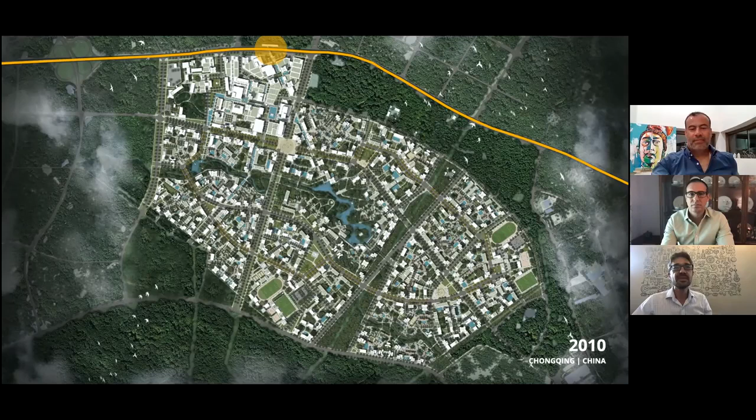This one, which you see here, we didn't think much of back in 2010, but it was the beginning of the Chinese expansion of high-speed rail. This is a completely new city that we designed from zero, and as you can see, the axis integrates nature and integrates the station into the urbanism.

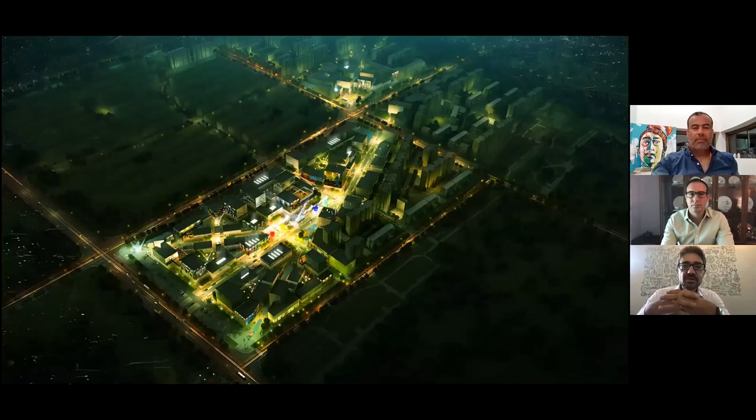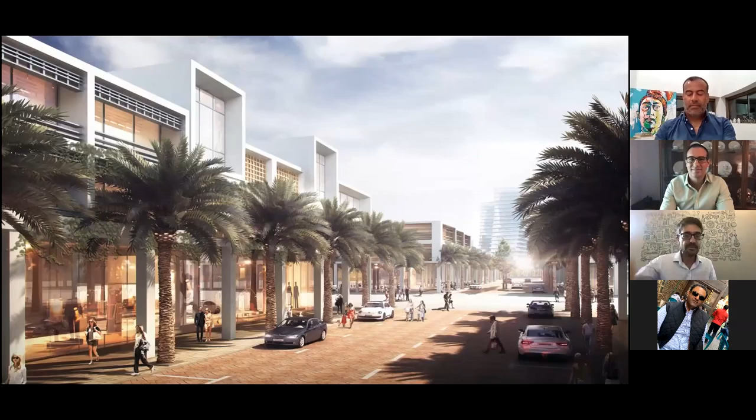We did this constantly, and within the last 10 years we've worked in over 24 cities in China, big and small, designing high density neighborhoods and towns to capture the migration happening from rural areas into the cities. Back then we understood it wasn't just about planning - it was also about the architecture and, more than anything, the behavior of mobility, which is the result of a well-orchestrated project, considering not just the 30,000 feet above our heads, but also how the detail at street level is put together. If we sacrifice that detail, that scrutiny, it will be disastrous for our city building.

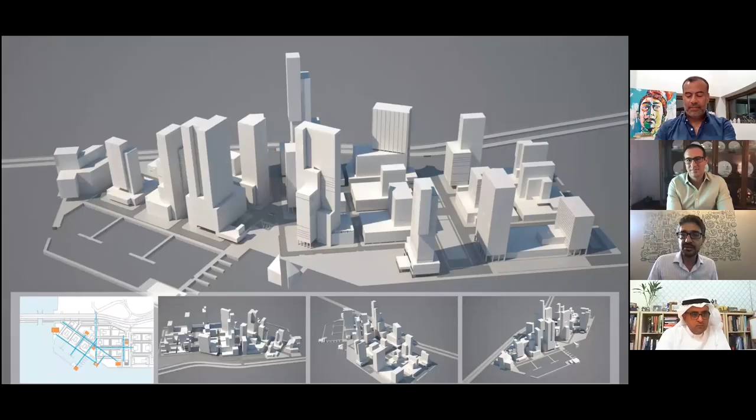So the architecture is extremely important - the way the buildings meet the street, provide shade, the landscape, the way cars park. That has been our interest for 10 years. We've little by little begun to really unravel the way these things are put together into transit-oriented developments. Nowhere is this more evident than in projects where two modes of transportation meet each other.

In this case, high speed rail and the waterfront - changing from land to water. So from China, we've done work in Oman, in the US, in Latin America. The way one connects, the way one walks, transfers between different modes of transportation is an essential way of moving - it's essential to our projects.

The architecture is also important, so we depend on local architects. We don't know everything in the world, and we don't pretend to. We're not one of these boastful architects that says 'I will do everything for you' - we don't. We work with local architects in every project. In this case, the architecture was done with Chinese architects on one of our projects, which needed to be iconic and memorable. It's located in the South China Sea, and as you can see, the architecture is very culturally related.

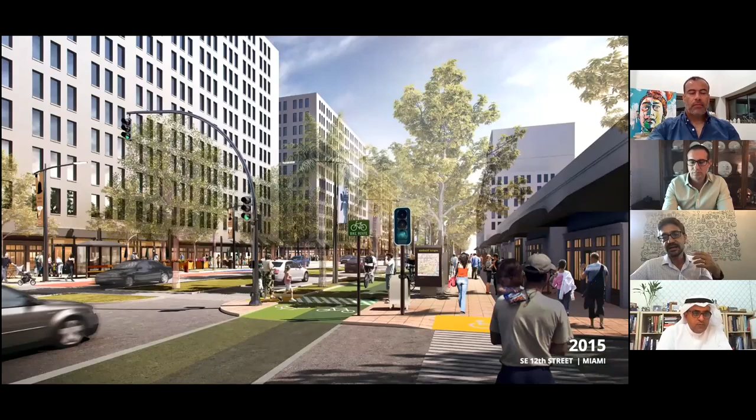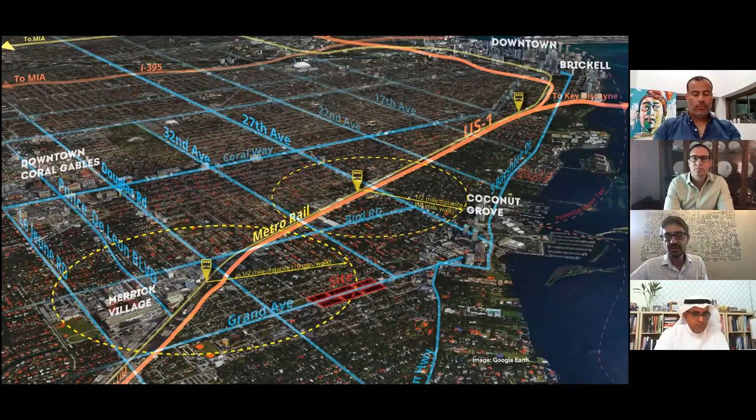In 2015, we realized that while we enjoyed working abroad, we had big problems in Miami. The main problems in Miami were transportation, mobility, and the way we honestly did not care about our streets. So we started working with the planning departments and with the departments of transportation to transform these streets with transit-oriented developments. One after the other, we realized there were opportunities for developers and places for people to live close to transit and have other methods of mobility.

Worked with several engineers to put this together, and not just the infrastructure, but the architecture that comes with it.

So little by little, we became more and more experts in the way people move, in the way people live, play, and work around transportation. So that essentially has become our focus. Our main focus for our office has been transit-oriented development, or what I would like to say, development around transit.

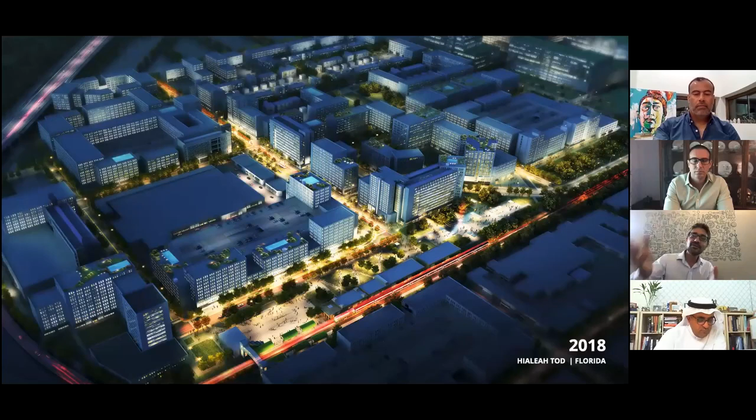I think that if you turn the words around, it is much easier to understand. This is also an image of our Hialeah TODs, which was awarded for Florida Planning for Economic Development. And with that, this is a very brief intro of 10 years of blood, sweat, and tears, as we like to say, but a lot of joy.

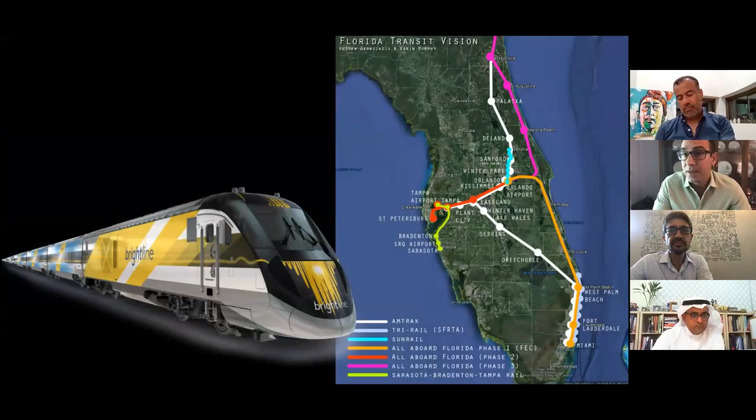In Florida right now, the state is seeking to reconstruct its rail system. We have investments, shown on this map, occurring in both the private and public sectors, such as Brightline, which is Virgin Trains by Richard Branson, along with other public sector investments beginning to form a skeleton of a rail system.

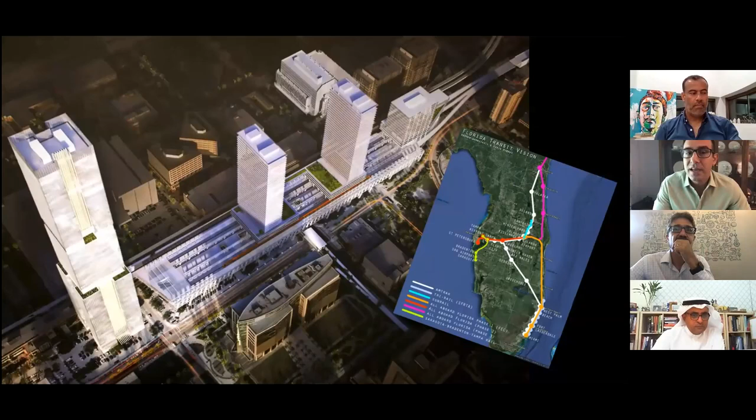This is an example of the TOD being built in Miami's downtown called Miami Central, the terminus of our higher speed rail system by Virgin Trains. In this case, the skyscrapers are in the station.

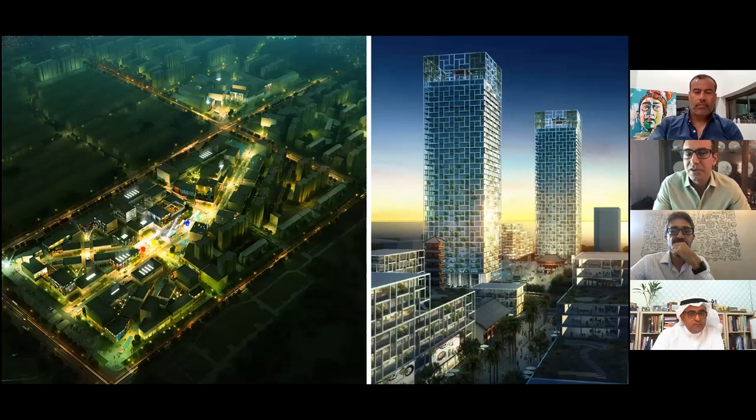But it need not only be skyscrapers. There are many examples where the scale is much more intimate and walk-up scale—higher density, but at a lower scale of buildings. These are from different projects.

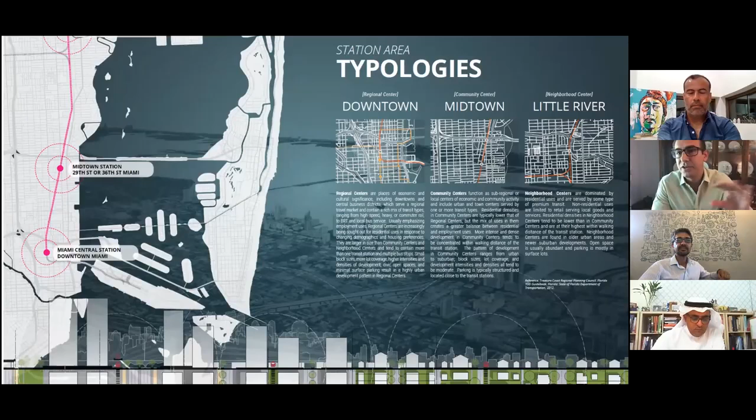Station area typologies: TOD takes a different format depending on several factors, such as the metropolitan context and the mode, and how many modes are crossing at a certain area. In this part of the line we're examining, we see at least three or four different station types: the downtown, a regional metropolitan hub; midtown, a more community, modest scale hub; and Little River, showing a more neighborhood scale station. Each of these has different implications in terms of density, height, and attributes.

In the downtown station, we look at the concept of the last mile—or last kilometer elsewhere in the world—referring to one's ability to walk or access other destinations once arrived. Sometimes this is the most difficult trip of all, and the one that can discourage someone from making the trip in the first place. If the last mile isn't wonderful, people often want to drive instead, so we need to make that last mile wonderful.

And so this is the Tri-Rail Coastal Link. As you see, we're going to skip about at some of these different stations of Miami, North Miami, and Aventura, and show a few different lessons from each of those in the presentation.

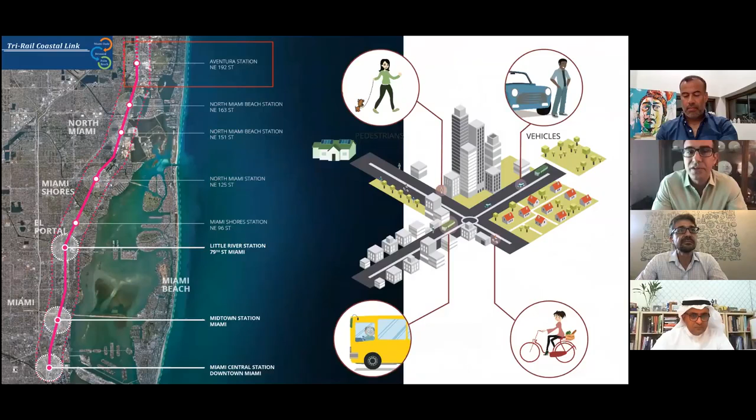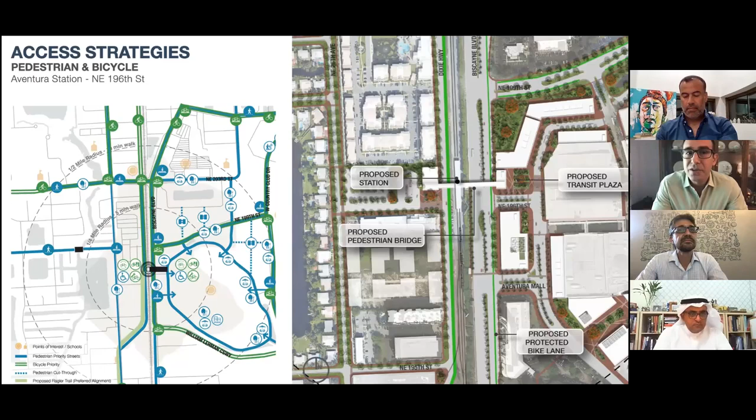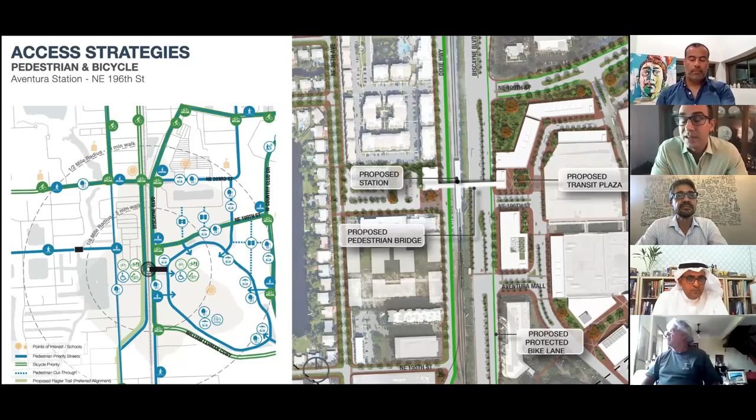And so this shows that multimodal necessity. So this one from Aventura shows the pedestrian and bicycle access. So this would fall within the public realm interventions, examining how does one approach the station, not only by automobile, if you're going to park there, but how would we walk to it? How would we bike to it? Or Uber, or whatever the method is. And so how comfortable and safe is that ride? And then identifying obstacles to that safety and that comfort, and showing how to change that over time.

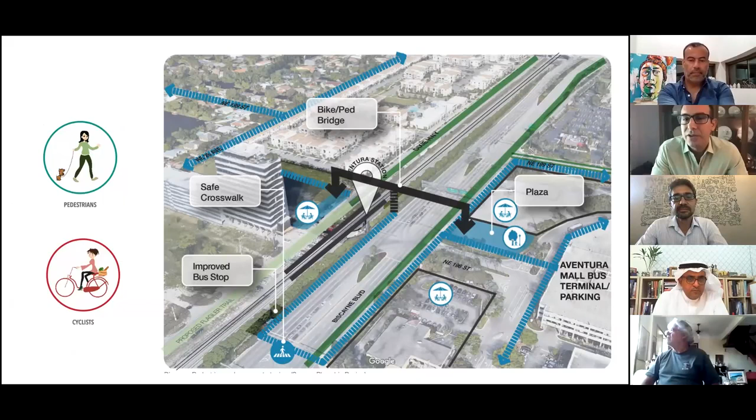In the SMART plan, which is really focused on Miami-Dade County, we have had the privilege of working on 5 of the 6 different corridors of transit. And as Sami had said, they are all different technologies. One is BRT for now, which will be perhaps rail in the future. Some of them are commuter rail, elevated rail, and there's even streetcar involved in rubber tire trolleys. And we have the higher speed terminus of the Virgin Trains, plus the airport. So basically it's a multimodal environment, each with different technologies, speeds, and station spacing.

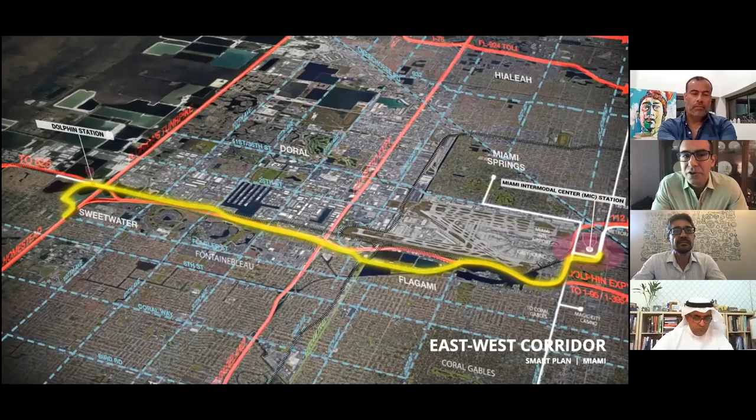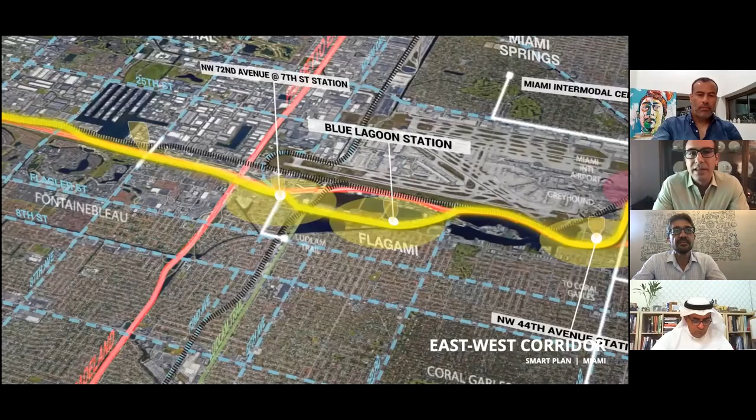So the east-west corridor is the first one we'll take a glimpse at. And this animation shows briefly how the east-west corridor links the downtown and the airport to a major university campus, which is Florida International University, and then all of the communities between those two poles, such as Blue Lagoon and the Dolphin Mall, and I'll show you the plans for those as well.

Andrew, may I ask, while you're sharing this and the different type of transit, what governs the infill development between the stations? We have different types of stations, different types of transit. As planners and urban designers, what makes it a successful development infill, and what is the criteria?

Well, some of the stations definitely have a theme. For instance, the university campus is really, of course, driven by the activities of the university, whereas others tend to be more employment driven. They're heavy on office and less so on other uses, whereas others are mostly residential. And I think it really has to do with some of the context. For instance, the ones next to the airport, it's a harder sell to imagine apartments and villas, especially with the noise of the jets taking off in one of America's busiest airports.

So sometimes it's a negative factor which makes the decision lead toward a certain preference of a use or not, or a certain density or not. But it really has to do with the quality of the transit, the frequency of the stops, because the more favored stations, the ones that have better service, generally have more residential demand to them as well.

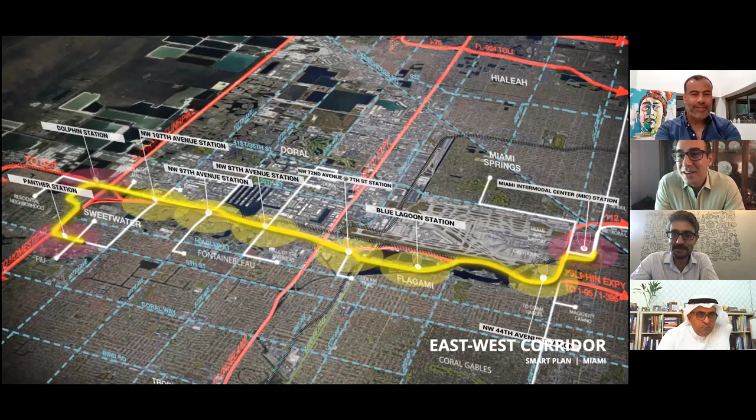In fact, in many projects, we come up with these beautiful renderings of these beautiful places, and then the data comes back and we have to bring it back down to reality. And so the images are not as wonderful, but they're real. And so we hope that, in the future, 40, 50 years, things will change. But there are renderings that I will not show you today because they are not as beautiful as the visions that we have. Our economic advisors will often stand there above our shoulder and say, that can't be 15 stories, you must make it 6 stories, and then we're brought down, we're humbled.

Okay, so this is a comment which is: vision precedes code. In other words, we always must vision before we know how to create the legislation to implement it. So coding is one thing, but visioning is another, and visioning should come before the codes or the zoning code reform.

Normally, who established the vision? Ideally, we'd love to be involved from the very beginning, so that we generate both the vision and then are involved in the code to help implement that vision. In some cases, a vision has already been created by another firm or the client, and we are asked to update it or write the legislation to implement it. So we enjoy working on both types of projects, either the whole package of visioning and code, or just one or the other.

Any cases of a design build? If it is design build, that means vision plus execution become very clear and obvious, and even the output is really fantastic, because the client and designer are working together at once. Certainly, in certain cases when it's a developer tender or RFQ, this is more so. When it's developer driven and the desire to build immediately is stated up front, the design is merely trying to get to construction documents rather than the longer public visioning exercise meant to allow several years for its build.

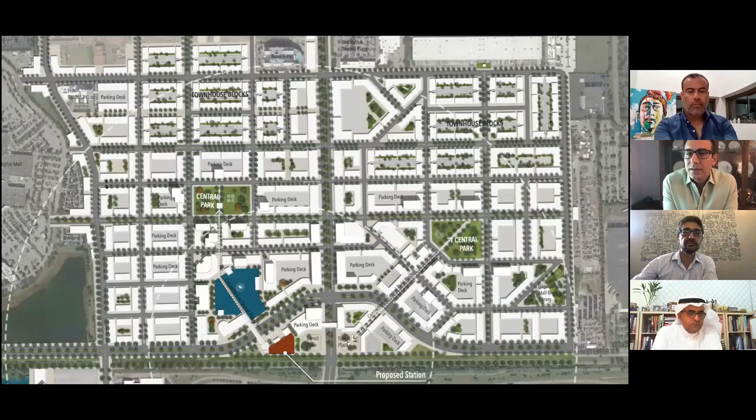We have some renderings. This is from a neighboring place on the train line, but it's representative of the type of scale one would see along this TOD, showing higher density but achieved at a lower height than the projects we've engaged in Asia or elsewhere abroad.

This shows that we're also interested not only in the higher view, but love getting into the details of paving schemes and landscape and the way buildings interface with the street, especially at ground level, so there's a sense of transparency and visual interest. This one shows a shared space, which is controversial in some places in the United States but very common in other cultures, where you remove the curbs and allow slow-moving vehicles to mix with pedestrians in that sort of civilized environment.

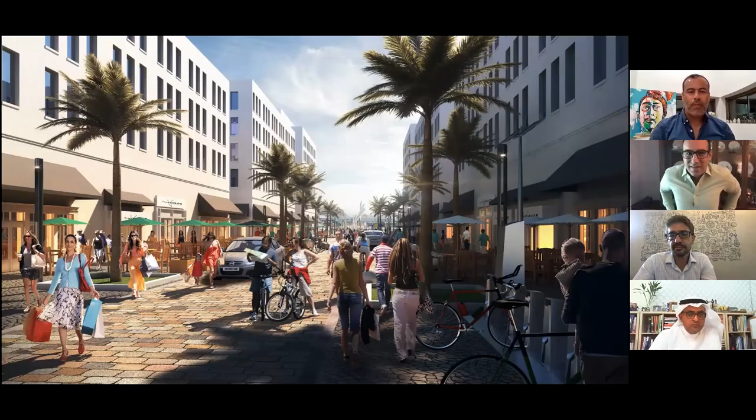But when it comes to larger streets, how would we do such things? You're absolutely right. A very wide boulevard or avenue or highway retrofit is a much different street design problem than doing a capillary, a neighborhood shopping street, or something of that scale.

So later on, I'll show you a few renderings that take on the topic of the larger street. But I think that when we look at the precedent of large streets that move volumes of traffic but are still a pleasant walking environment.

Think of the boulevards of Barcelona, like the Passeig de Gracia, or the famous ones in France. You can see examples of places with wide sidewalks, street trees, interesting architecture, and yet extraordinary high volumes of automobiles—sometimes 50 to 100,000 per day, comparable to our interstate freeway volumes—but they do so without being a blighting influence. They're a value-added good address, whereas our interstate freeway systems are not an address, but something we turn away from because they're so offensive.

So even in the United States, there's a wave of freeway teardowns occurring in American cities, in which highways that were once elevated are now turning into boulevards at grade. So that's another thing we could speak about in the future.

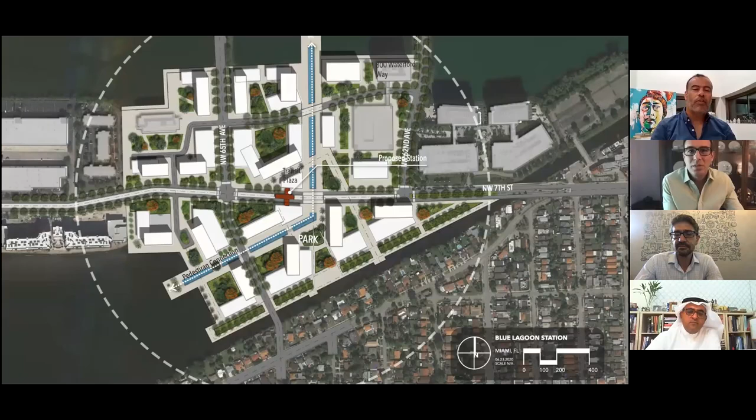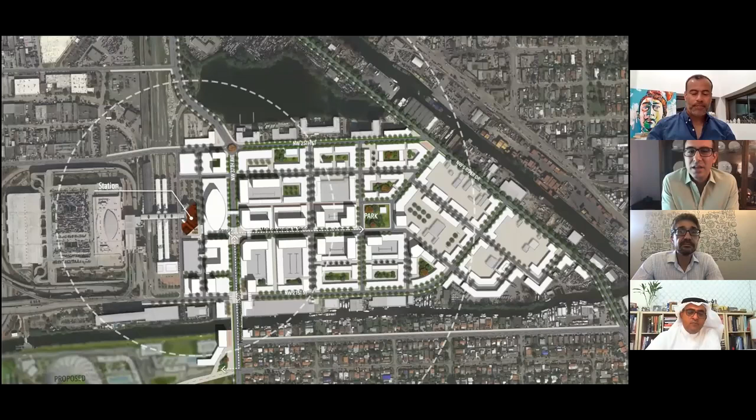Yes. So this is the Miami Intermodal Center, and it's particularly interesting because there are about 5 or 6 different modes converging upon this one spot. One is the airport itself, which is one of the busiest in the nation and services all of Latin America, direct flights to Europe, etc.—Miami International Airport. Then there are three different scales of train arriving here: Metro Rail, our elevated metro system, the shuttle to the airport, and also an Amtrak station. And I think there's also Tri-Rail.

So maybe there are 4 rail systems coming here, plus a car rental hub. This was an underutilized piece of industrial property located immediately to the east of that hub. This study was looking at how that could be reclaimed to create at least 20 blocks of urban infill and redevelopment opportunities geared toward those who wish to be near the airport, both for employment purposes or even residential in a limited fashion.

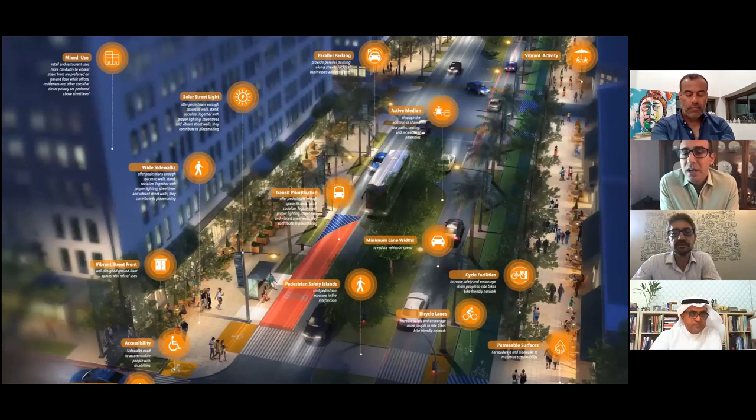These are street design diagrams showing the importance of starting to look at the fine scale of both paving, crosswalks, illumination, trees, and how all of this comes together in an ensemble that creates the public realm. And I don't know if this was the right place to talk about it, but nighttime experience is important.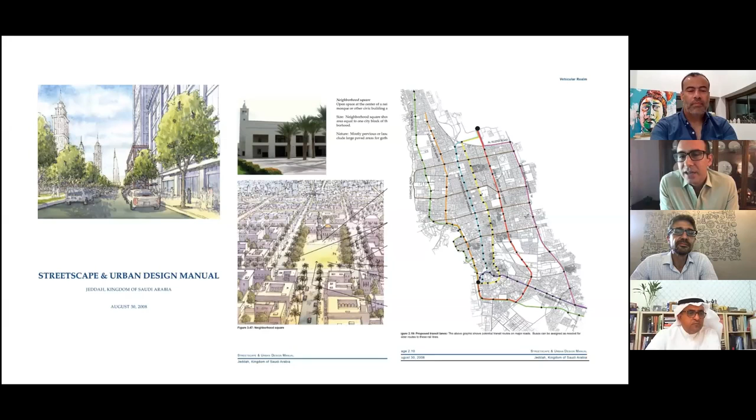So that's exactly you're answering my previous question in a layer, which is wonderful. Thank you. So you still could make it happy, lively, and still have the car transit not delayed, but can also...

Pedestrian attractive as well. Yes, and once again, you've already started to do that in Saudi Arabia, because these roads have a boulevard format. In some cases, they have a slow-moving frontage road where drop-offs and parking and access can occur, but then the main thoroughfare is unimpeded by that parking and such.

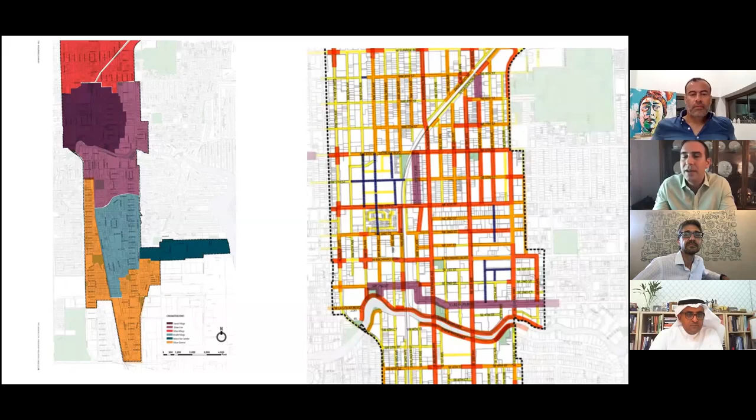This is an example of a code which looks at both the regulating plan of the zoning districts, and on the right you see what is called the ABC streets map. In a code, it's always important to acknowledge which streets are of the highest priority and get the best treatment, because not every street in the city can be a great pedestrian frontage. Some are more messy, some more utilitarian, others more geared toward pedestrian and shopping. Each street has a different context.

What you see in dark blue are also the super blocks that need to be cut up, or in which new connections need to be added. Then there are several pages showing the different cross sections envisioned on a street atlas, so you can see how the streets ought to be rebuilt in the future in order to reinforce pedestrian comfort and safety, and ease of access to transit.

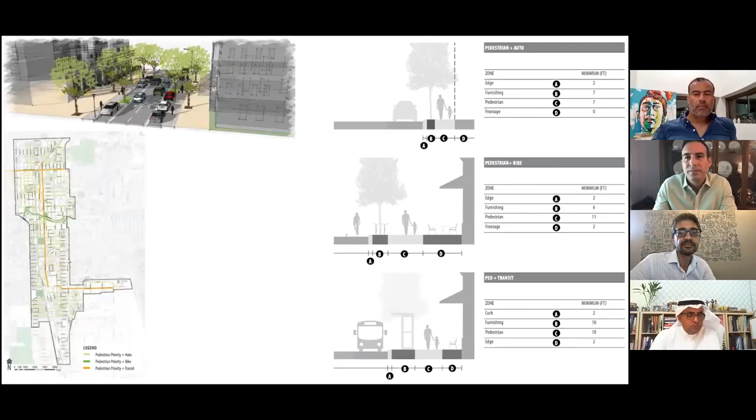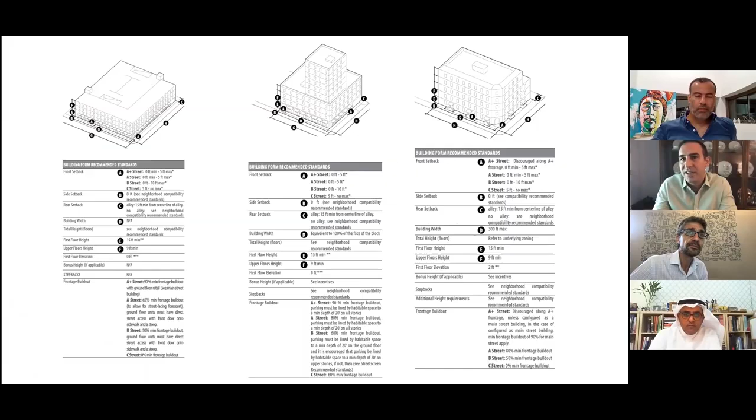And finally, there are building typologies or building types, which have dimensional requirements, so that we would be able to compose that fabric with buildings of varying height and scale that meet the density requirements for that transit investment. These are samples of the building type recommendations.

And these are also ones for transparency, because nothing is worse than walking along a blank wall, which happens a lot in our country. So we want to avoid blank wall syndrome, so that safety and visual interest can be encouraged by having lots of transparency, especially in the first two floors.

Day and night as well. We call that CPTED, Crime Prevention Through Environmental Design, which is a series of principles that we look to thwart antisocial behavior and crime through good design.

Like bank designs. New bank designs are all about full transparency for security reasons. What is the minimum percentage of transparency typically in code in urban streets?

Generally, in ground floors of retail environments, it tends to be a minimum of 50 or 60% glazing at the ground floor. But in residential and office upper floors it tends to be less, usually 15% minimum, 10% in some cultures, depending upon the climate and the local building practice. But we see that there's a range of percentages really depending upon the use and the desired building articulation.

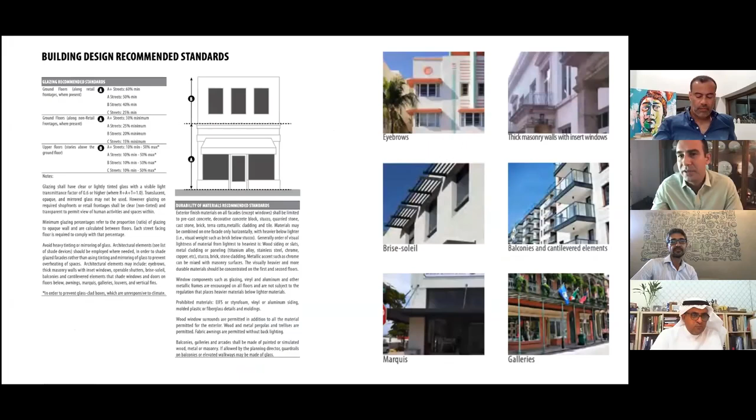And then, of course, there are recommendations also on making sure that street trees have a longer lifespan by looking at proper planting regimens and other details, so that we can keep that important feature of pedestrian comfort intact, which is the tree, the urban tree.

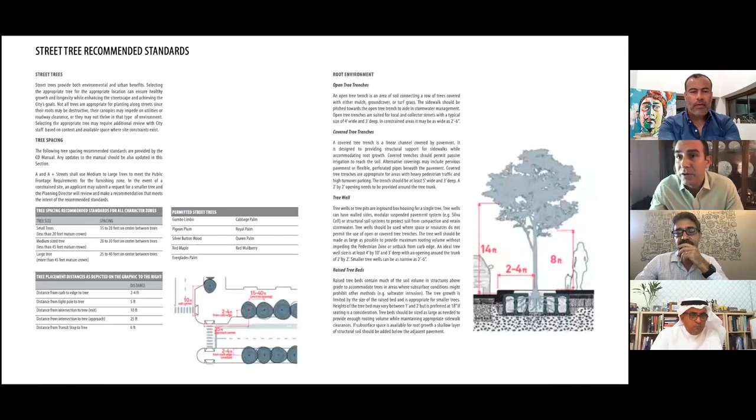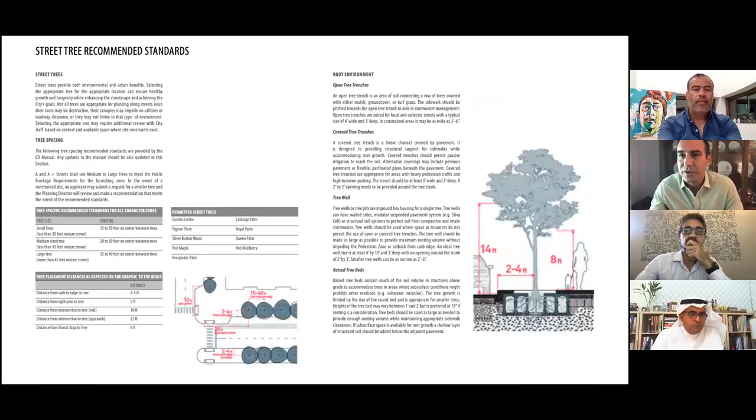So are specific trees more appropriate for an urban space than normal trees? Yes, particularly trees that tolerate a lot of foot traffic along their roots, and those which can sometimes be drought tolerant in case watering isn't occurring as often as it should be. So a series of factors would lead us to choose one tree over another. Sometimes it even goes down to how often the tree sheds its leaves, so that it's not too messy a tree, for instance. Many other factors would lead one to choose one or another.

That's where you need an expert landscape designer with the team. Certainly, yes. A local landscape architect will help us to be species sensitive, because sometimes if we land in another place and we don't really know yet, even if we thought we've researched it, we really need somebody local to help us understand it.

And then, this is a very new science in form-based codes, which is sea level rise adaptation strategies and resilience strategies. So the form-based code for the entire city of Miami, Miami 21, is undergoing a resilience audit right now so that these things can be built into it. And we were able to put some of these recommendations into the Fort Lauderdale downtown code as well.

So we see that coastal Florida cities and places around the world that are threatened by sea level rise, like Holland, Bangladesh, Rio, and the Maldives, all of these places are low-lying and have high population densities that will be threatened by one to two meters of sea level rise in the coming 50 to 100 years, which we need to think about already.

Would cities like Dammam or Jeddah have to consider such a threat, probably even in the long run? I believe so, because I remember when I was in Jeddah, we had the heaviest rainstorm of the year, and because Jeddah has no stormwater system, there were trucks that had to suck the water from the edge of the streets in several districts.

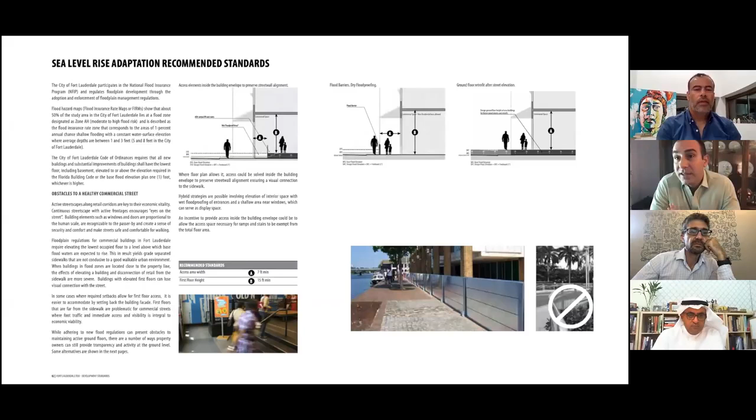I see, so it's similar to some parts of Miami, where at 2.5 to 3 meters, the groundwater is also becoming higher as the sea level puts pressure on the ground aquifers. So we're seeing the ground becoming more susceptible to flooding even in fair weather, because of that phenomenon. I don't know the geology of Dammam, but I imagine it could be a sandy substrate similar to Miami's, so maybe it is under threat as well.

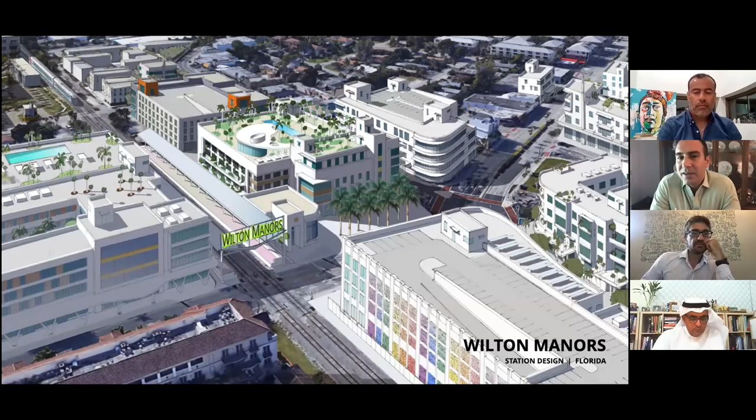Finally, this is very near the end of the presentation. These are a few renderings done for zoning studies along that three-county northeast corridor. This is Wilton Manors, showing a potential station location, and then the ability to redevelop the surrounding properties to add density around that station and attract new riders and new residents.

What is the minimum length of the corridors, Andrew? Like this project, what is the minimum corridor to call it a corridor and make an impact? And second, how do you call on the owners around the corridors for improving buildings and increasing densities on those properties? So basically, how do we determine the amount of land that's studied around each station, and the length of the corridors? Is there any minimum length for it?

Well, no, this one is a very long corridor. It's actually hundreds of miles long, and it has two different speeds which will be accommodated there. One is a commuter rail that has very frequent stops, and the other is a higher speed express train, which accelerates up to 120 miles per hour between cities. Some stations have both the commuter and the higher speed service, but the commuter rail is only about 50 miles long, while the other is 280 miles long. So really, it's two different size corridors.

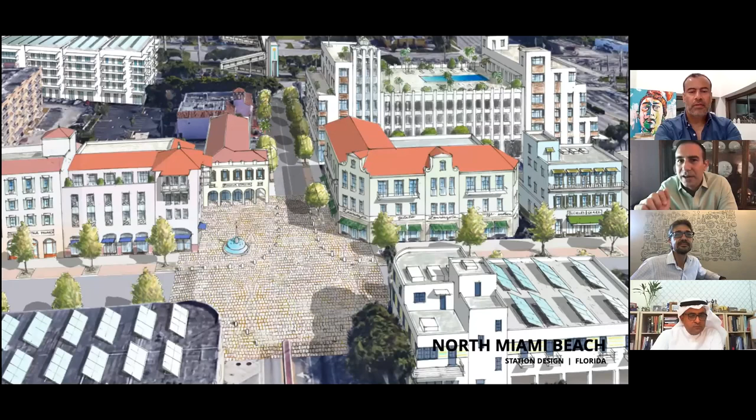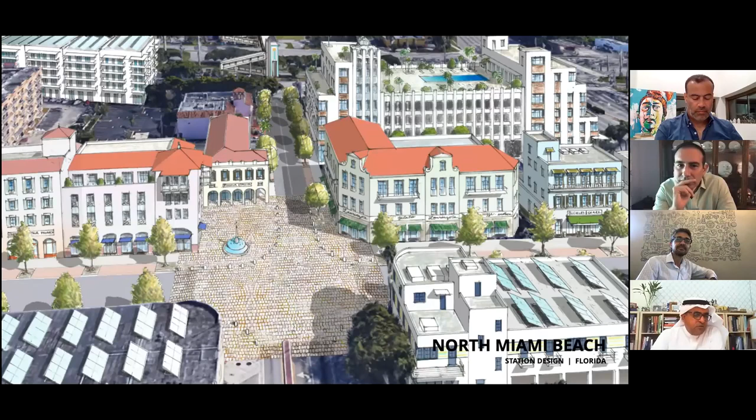I have one question here. In a previous image, for that intersection, how do you as a designer determine the form-based code for the neighborhood surrounded by it? Is that true, is that the neighborhood... the code makes the neighborhood undesirable? Is that right? That means the neighborhood suffers from the code?

I believe, as an optimist, if designed with love and care, the TOD improves the livability and the aesthetics of the neighborhood. But one could have transit-oriented development that was insensitive as well, and that could be detrimental. So it really does make a difference to have a handle on the different designs, particularly whether buildings are street friendly or not. It's not just important to be dense or mixed use, but what is the quality of those facades as perceived by the pedestrian. That makes all the difference in inspiring them to walk or not.

Another thing that we have found is that, especially in the areas that we work, around the rail lines has typically not been high demand residential and have not really brought values of those properties up.

That's something that's changing right now. Being next to the station is actually, as Andrew was discussing earlier, an improvement. It is actually desirable, but it hasn't been for many decades. Typically you have—and I'm showing this slide because as you can see, the quality here is not very residential-like. You don't have many people that are against the improvement of the area.

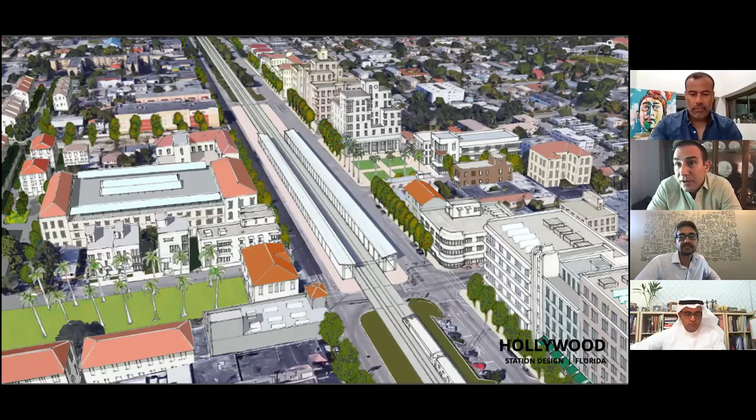This is downtown Hollywood, also looking at the zoning, both the permitted uses and densities currently on the books, and searching for ways to propose modifications to the zoning code based on the community vision. That's what this was, a sketch created during that exercise.

We are very grateful for having listened and paid such close attention, and for the questions you will give us now. Thank you very much.

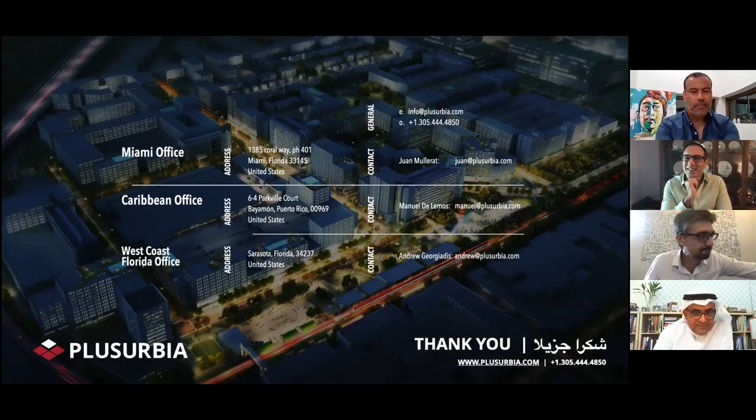Hello everyone. Hello, Dr. Atif, greetings. Hello. Dr. Atif, you're muted - unmute Dr. Atif please. I've been muted by the moderator. Oh no, my mistake, go ahead.

Sorry, okay. I think it's afternoon now in Miami, so thank you guys for speaking to us from across the Atlantic. Andrew and Juan are, I think, the best prophets for the TOD philosophy, and I think we are all converted.

It's logical, I think, but we are still struggling with it here in Saudi Arabia. I'm speaking to you from Riyadh, and I was really touched by the story of your grandfather, Andrew. During your presentation you answered most of my design questions, but we still here in Riyadh are crawling to be a TOD city still, with the development of our metro line happening very, very slowly.

There are no real questions - it's very hard to dispute any of the suggestions and proposals in this presentation, especially the first and last mile and conversion of a street to be more receptive to pedestrians, all great concepts. But then looking at - and I'm not an expert in this, I'm an architect - the whole value chain of TOD, and I'm taking Riyadh as an example.

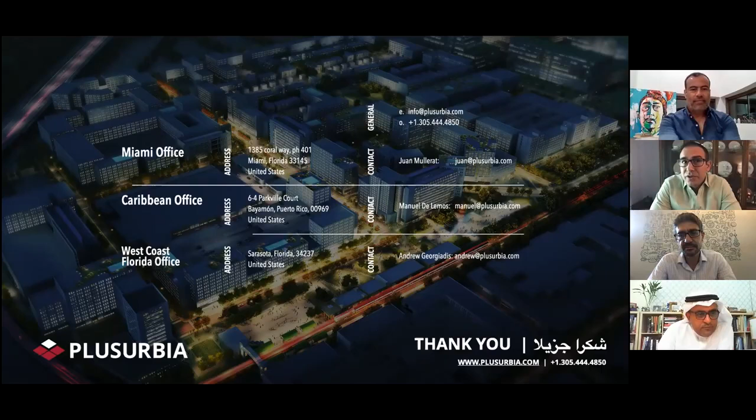When President Obama was president, there was the high-speed rail program, which unfortunately floundered due to political and financial reasons. But what it did do was call attention to upgrades needed in certain corridors.

Particularly that's happening in Cascadia, which is the Seattle, Portland, Vancouver corridor. It's also occurring in Chicago, in the Great Lakes wheel and hub and spoke system. So we see St. Louis, Cleveland, Chicago. There are new upgrades on the rail lines there.

And then, also very controversially, there is the Texas high-speed rail program, which one of our friends asked about eminent domain. It's currently the most high-profile eminent domain case in the nation, because it's not only using the abandoned rights of way, but it's also having to look at putting the viaducts across private ranches. This is being done by eminent domain, so they still are able to have the ranch intact, but there's a column spaced every 100 feet going into the ranch.

The unused rail corridor project is happening in little pieces here and there across the continent, but not in a unified way yet. Andrew, we have 5 minutes to wrap up.